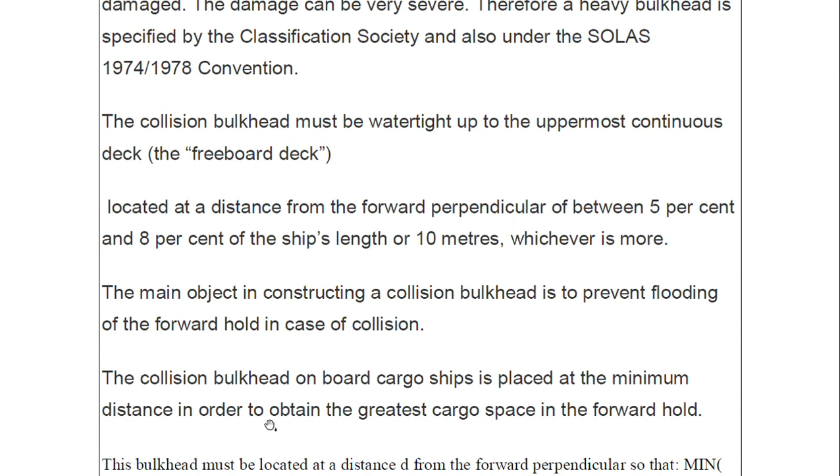The collision bulkhead on board cargo ships is placed at the minimum distance in order to obtain the greatest cargo space in the forward hold. Because shipping is a business of profit: the more cargo it can carry, the more profit generation there is for the company.

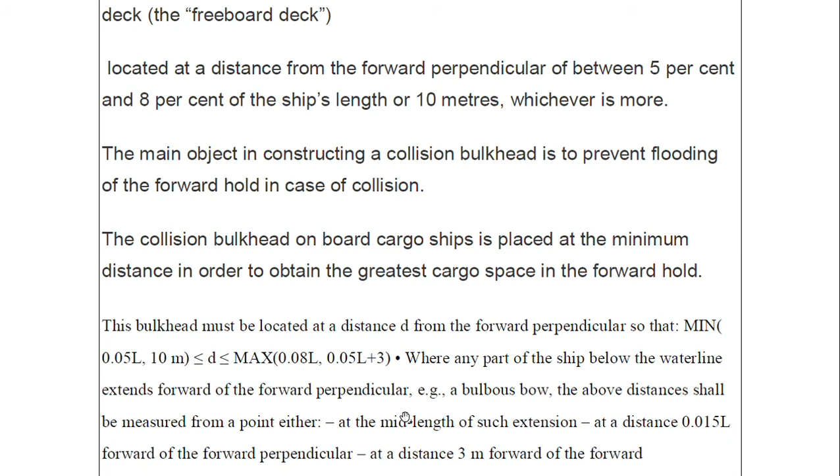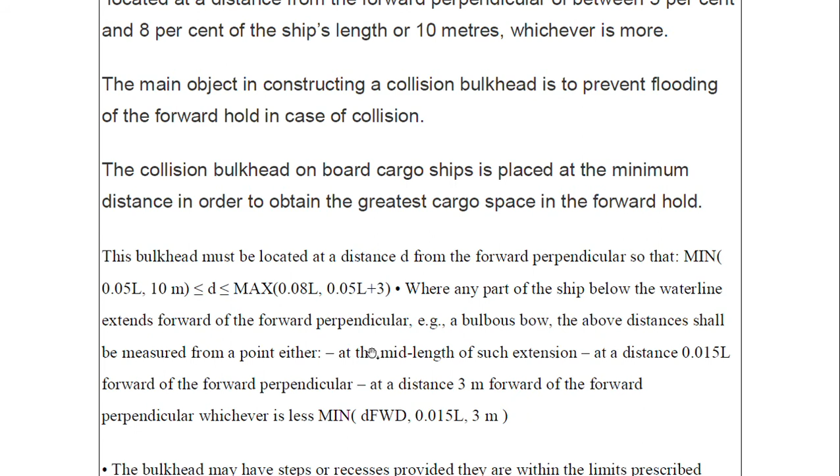The bulkhead must be located at a distance d from the forward perpendicular. What has to be the minimum limit? The limit has to be 0.05 L, or 10 meters; it has to be greater than this. The maximum is less than 0.08 L, or 0.05 L plus 3 meters, as we were discussing at the top. So this you can see here: 5%, 8%, or 10 meters.

When any part of the ship below the waterline extends forward of the forward perpendicular, like a bulbous bow, the above distance shall be measured from a point either at the mid length of such extension, at a distance of 0.015 L forward of the forward perpendicular, or at a distance 3 meters forward of the forward perpendicular, whichever is less. So minimum of 0.015 L or 3 meters. The bulkhead may have steps; it does not have to be one metal plate. The bulkhead may have steps or recesses provided they are within the limits prescribed previously.

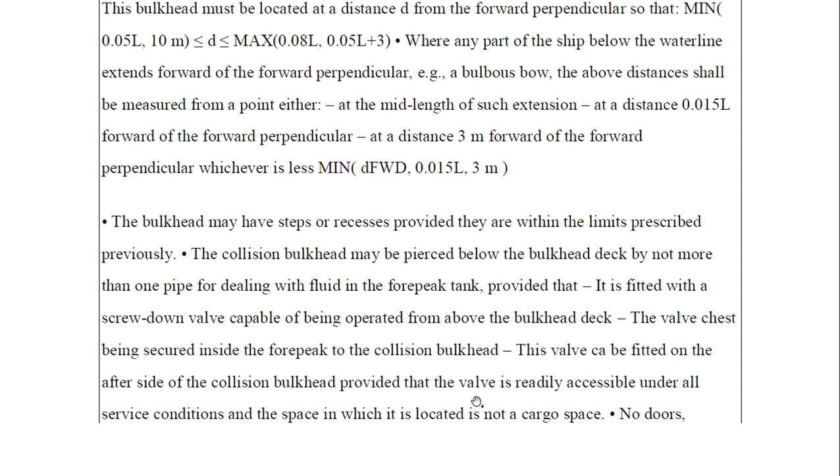The collision bulkhead may be pierced below the bulkhead deck, but only by not more than one pipe for dealing with fluid in the fore peak tank, because we have the fore peak tank forward and the pipeline has to run from the engine room. This is provided that it is fitted with a screw down valve capable of being operated from above the bulkhead deck, the valve chest being secured inside the forepeak to the collision bulkhead. This valve can be fitted on the after side of the collision bulkhead, provided that the valve is readily accessible under all service conditions and the space in which it is located is not a cargo space.

No doors, manholes, access openings, ventilation ducts or any other openings shall be fitted in the collision bulkhead below the bulkhead deck. Access doors or access openings are not allowed on the collision bulkhead under the safety line. The collision bulkhead under the safety line cannot be crossed by more than one pipe for the service of the liquid contained in the forepeak tank, and the pipe must be provided with a valve driven from a point above the bulkhead deck. The valve body shall be fixed to the collision bulkhead on the inner side of the peak tank.

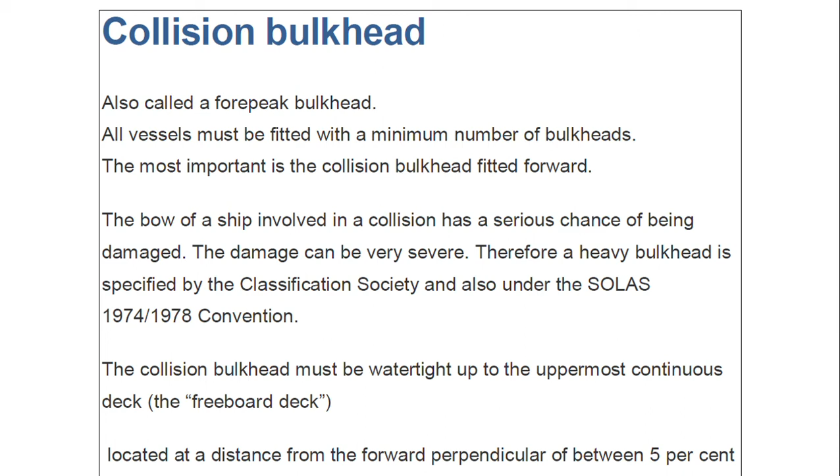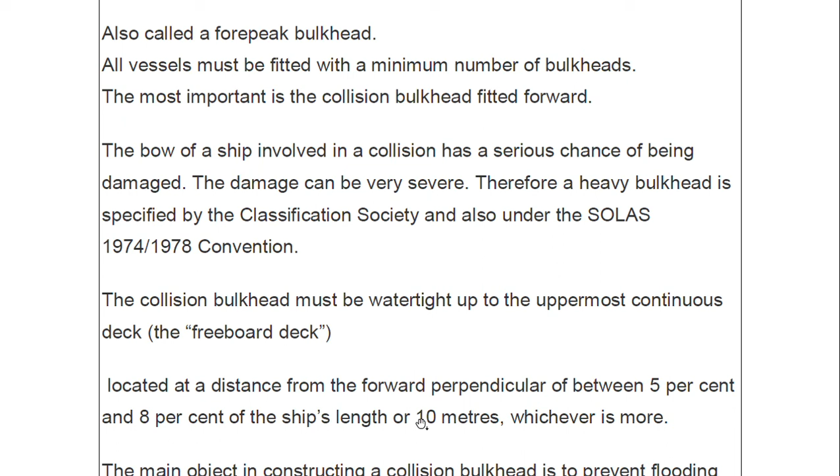So these were the different requirements: the bulkhead has to run continuously from bottom to top. There are three criteria on which the collision bulkhead is decided: floodability calculation, SOLAS, and the classification society. In SOLAS you will find it in chapter 2, and the revised one is chapter 2 part 2. It has to run continuously till the freeboard deck, located between 5% to 8% of the ship's length, or 10 meters, whichever is more. The main objective of the construction is to prevent flooding in case there is a collision.

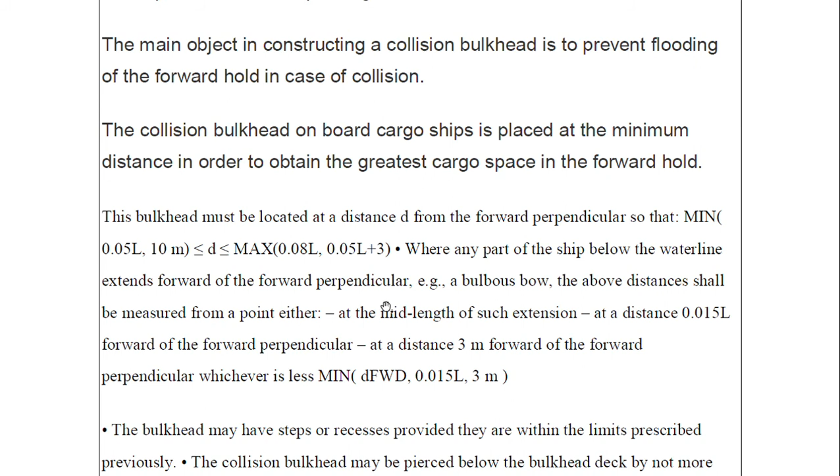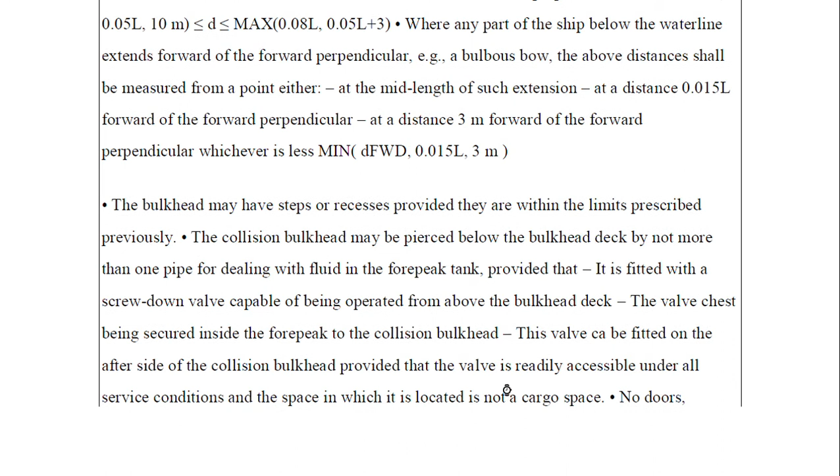It has to be at a distance d, defined as between 0.05 L to 0.08 L, or 10 meters to 0.05 L plus 3, whichever is more. So it has a minimum and maximum. There must not be any piercing except one pipeline that can run for the fore peak tank, and that too has to be provided with a screw down non-return valve. So these are the different criteria that we have for the collision bulkhead. I hope it is clear for you.